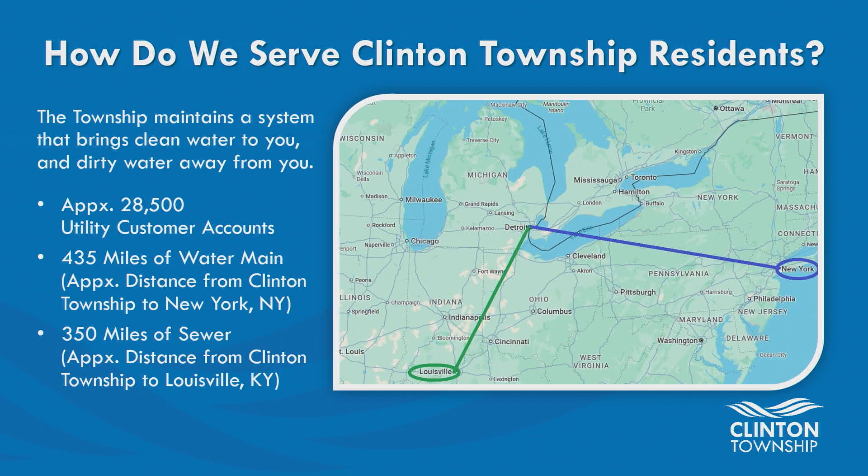So how do we serve Clinton Township residents? We have approximately 28,500 customers that we serve. We have 435 miles of water main. That is approximately, if you put pipe against pipe, end against end, from Clinton Township to New York City. Sewer lines, we have 350 miles of sanitary sewer lines, which is approximately from Clinton Township to Louisville. When we were putting this together for a visual, it's just seeing the amount of mains, but of course those mains also have thousands of hydrants and valves that we also maintain with approximately 26 utility workers. So the enormity of the system and how much we do maintain, I don't think it can equate to a slide, but we try to do our best with the distance to the cities.

So part 1, we're going to talk about water first. We purchase our water. We do not do our own treatment. We don't have our own well. Some places, some communities do. We actually get our water from the Great Lakes Water Authority, otherwise formerly known as Detroit Water and Sewerage Department. And there are sections in the township that we actually get water from the city of Mount Clemens.

Our testing of our water to make sure that it's safe and reliable is in partnership with GLWA and Mount Clemens. And then anything you want to know about our water, by state law, we have to put out what's called our annual drinking water quality report. That comes out in July every year, and that report is available online. This July we'll have a new one that comes out, and you can look back at past history. We have all of them up there, so you can look back on it. But that's kind of the science behind it, so I'm not going to get into all that, but it's there if you want to be able to see it.

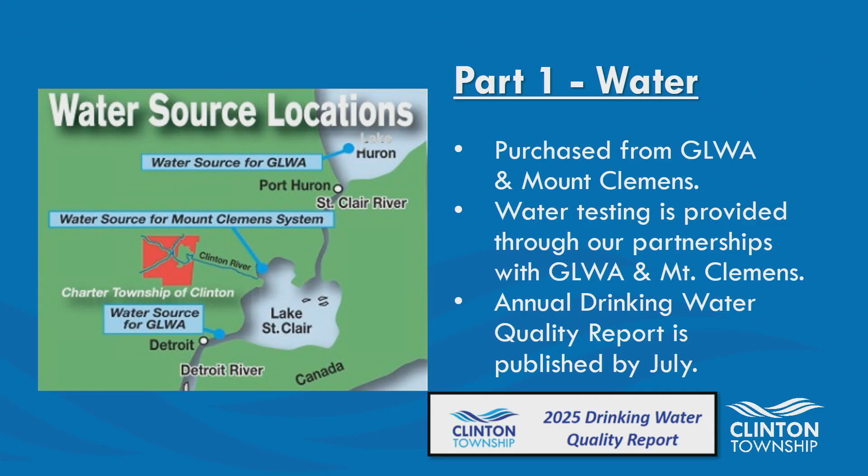So what do we do for you? What is our responsibilities? We maintain and replace our water meters. We maintain evaluations of our water lines. We repair water main breaks. Hopefully none of you have had those this winter. We've had quite a few just because of how cold it was, but not like we did back 10 years ago, so that's a good thing.

We run our cross connections and backflow inspection. And then we also do what's called our complete distribution system materials inventory. Some of you may have seen this. This is a result of the issue that happened in Flint and making sure that we don't have lead water lines. So this is to make sure that if we do, that we replace them.

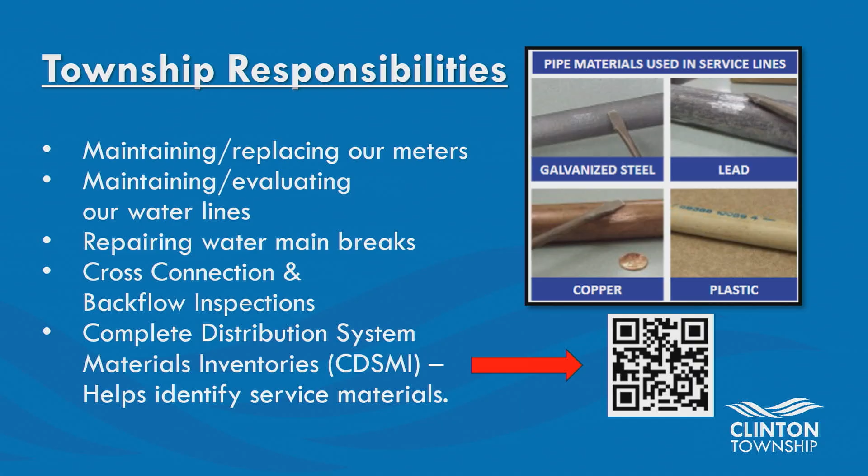Some of you here today, and being that it's on tape, may have gotten a letter from us saying, hey, we need your help. Please use this QR code or call us to make an appointment. So if anyone's concerned or has any questions, you can call us, the department, and we can walk you through how to take a survey. We also accept emails or meter appointments as well.

So here are some homeowner responsibilities that you may or may not think about or know about. Your responsibilities involve leaks and high usage. We can't monitor every home. We have 28,500 accounts, so we can't monitor every home and say, oh, it looks like you have a leak. So it's your responsibility to make sure that your plumbing is working properly. Repairs within the home, that's your plumbing, making sure those are taken care of. The repairs from the street to the shutoff valve, there's like a round circle that you sometimes see in sidewalks or in your yard, that's your shutoff valve. From that to the house, and into your home, that is the homeowner's responsibility.

And then any potential cross connections. I think it's important to point out, so we went through the responsibilities of the homeowner, but also offerings that we can help with these things. We do have leak detection packets available. So if you think you have a leak, sometimes you have a high water bill and you see your sink running and you go, oh, I have a leak.

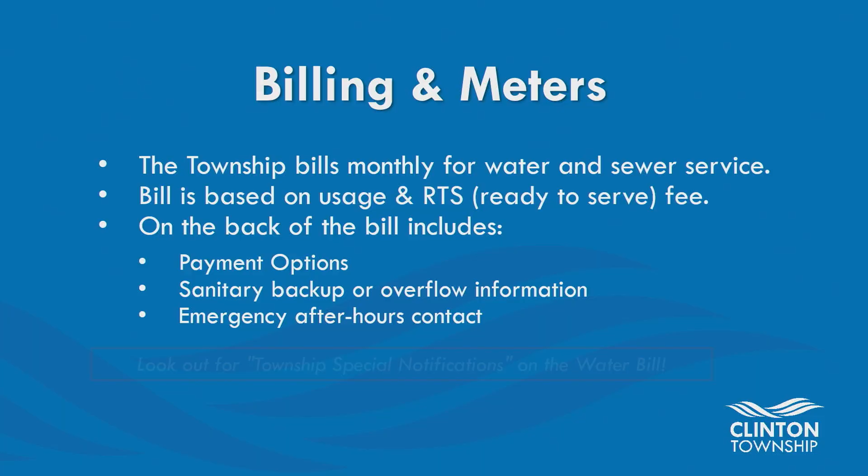Going into billing and meters, the township does send monthly water and sewer bills. Some other communities do quarterly, but we have been doing monthly since before I came to the township, so that's been for over 20 years. We do have on our bill a ready-to-serve fee as well as a usage fee, and I'll show you some of that on the next slide.

The back of our bill tells you about our different payment options. It has information regarding sanitary sewer backups and overflow, and our after-hours contact number. Last but not least, on the front of the bill we have a section for township special notifications. There we'll put different things - this conversation today was put on the last water bill, and when we do the water quality report, that will be put on the water bill too.

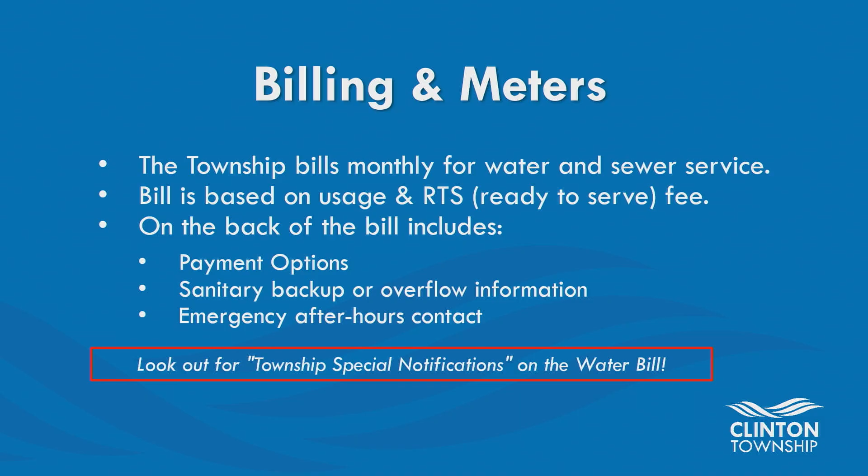The next line is your sewer. Sewer is based on your water - we don't have a meter on your sewer, so if you use 2 units of water, we assume 2 units of sewer goes down the toilet or shower or whatever you're using. That's where, if you have an irrigation system, a deduct meter is worth using, because the water that goes on your lawn doesn't go into the sewer, so those numbers would be different. You might see water use of 7 and sewer use of 2 or 5, because we deduct what went into the yard.

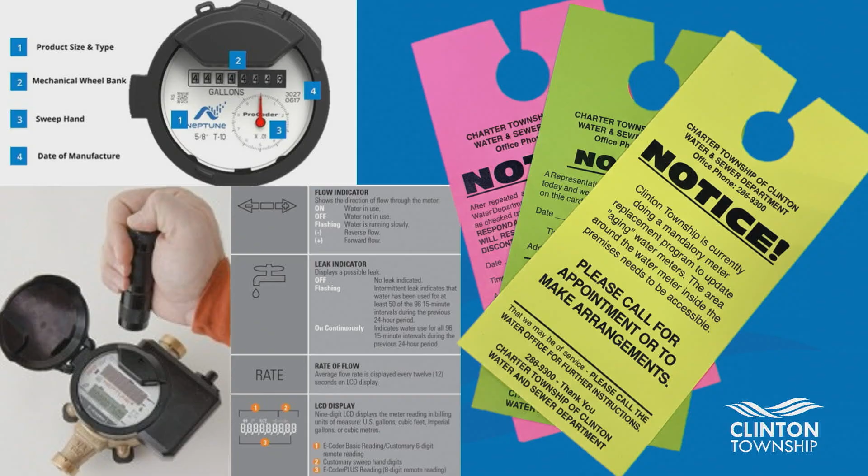Early on in the meter change-out program, we were using digital readouts. With newer technology, the ProCoder, which came out a couple years ago, does the same thing - it takes the same technological readings - but now it goes back to the analog dial that most people with older meters are used to, where if the water's moving, the bottom hand, the sweep, is moving, and the units are registered on the top dial.

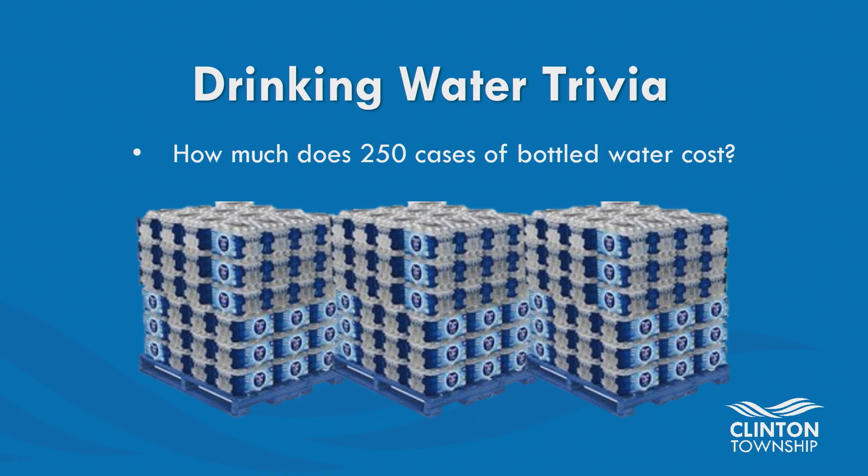Okay, here's a little drinking water trivia. How much does 250 cases of bottled water cost? 250 cases of water cost $742.50. I'll tell you, I use Meijer or Kroger on sale at $2.97 a case, so I was bargain shopping for you to get this number, okay?

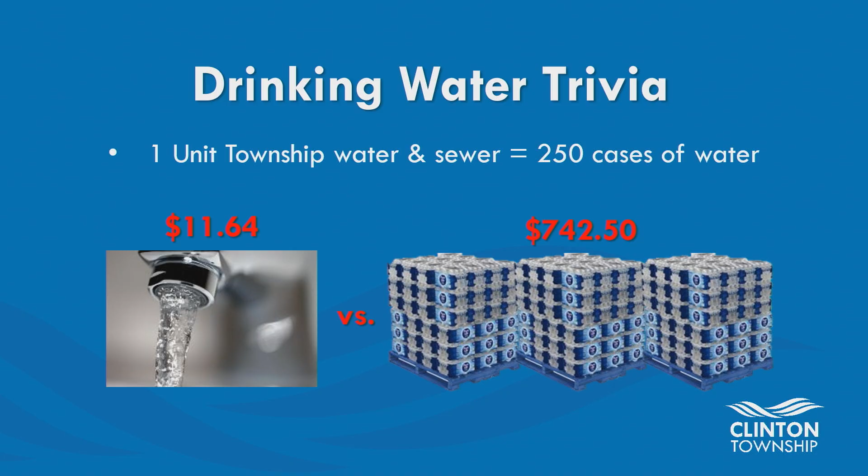One unit of township water - so when we look at that bill and say a person used 2 units, they used 500 cases of water, because 1 unit of water equals approximately 250 cases of water. Using Clinton Township's water rates, that would have cost you $11.64.

Part 2: what happens to water after we use it? It goes to the sanitary sewer. In Clinton Township, we're on what's called a separated system, meaning you have a sanitary system and a storm system. Sanitary systems carry your toilet water, shower water, laundry, all the things that go down the drain - I'll call it dirty water. Your storm water sewer system is for storms, rainwater - it's what you see in the streets, the catch basins, picking up rainwater and water that comes from the sky.

The sanitary sewer is taken away from your property. It's typically located near the street, usually between the street and the sidewalk area. The pipes lead to a treatment plant, and the township sends their sewer to what's called the MID, the Macomb Interceptor Drain Drainage District.

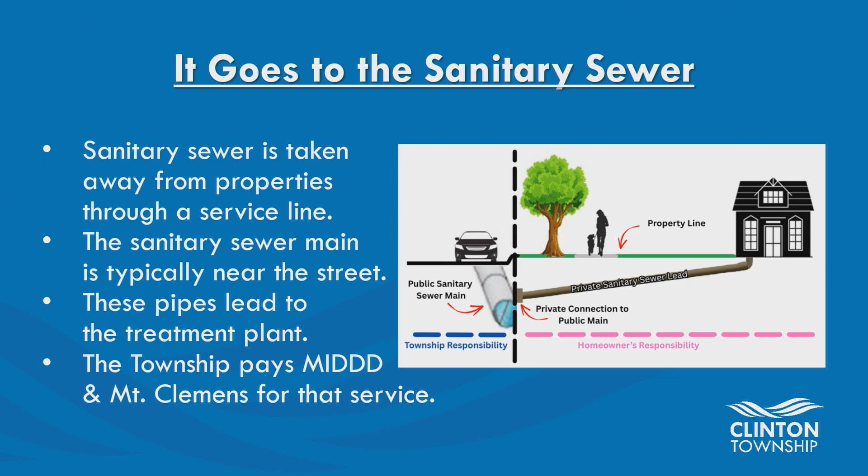I think that's a good segue into what we're going to talk about next, and how intricate the systems are, because there's homeowner responsibilities and there's our responsibilities. One thing that comes to mind is when we talk about whether it goes to the MID or to Mount Clemens - Clinton Township is unique with the river and its three different branches, so a lot of our system has ups and downs.

Some of the reasons why sanitary water goes to Mount Clemens is based on geography. The water geography fed from Mount Clemens is a little different than the sanitary flow - some areas that get water from Mount Clemens actually send sewage to the MID system, and some areas that get water through Clinton Township actually send it to Mount Clemens. So it's kind of interesting to me, but we thought this would be the best way to explain it, because it also encapsulates how Clinton Township runs.

Most of your sewer is gravity fed, so it goes from a higher portion to a lower portion. With our sewers, we have to get it back up to a certain height to keep it going to Mount Clemens, depending on where it goes. Clinton Township has 13 lift stations that we operate. People don't really see that part of our operation because most of the time your sewage goes away with no problems and people aren't affected. That's one of the things that's out of sight, out of mind, as Mary said. But we take pride in these 13 pump stations because it takes a lot of work and maintenance to keep them running.

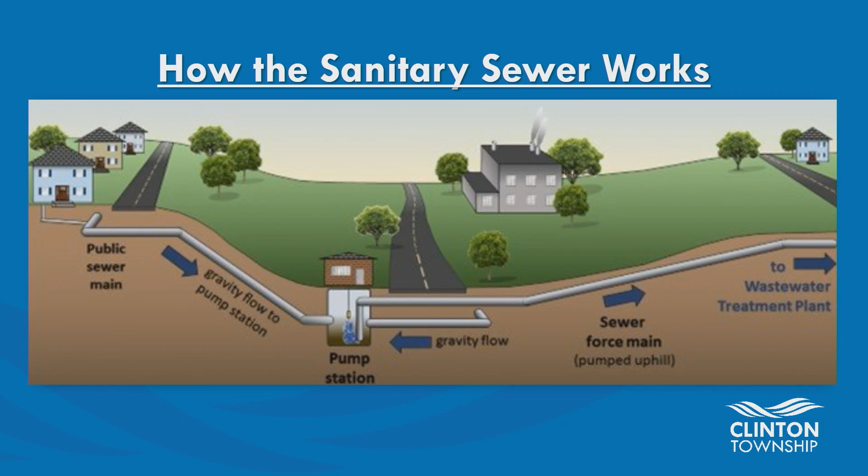I'm sure hardly anybody's ever looked inside the pipe. So what we wanted to show here is this first picture is the pipe that the camera is in. We're sitting in a pipe, and what we're looking at is called a lateral offset. So if this was your home, your lead is offset, it's not going in properly. What you want to see is more like the second one, where it's a complete circle and you're coming right into our pipe. The first one is the offset, and the second one is fixing that offset so the pipe comes right in. If you look at your sewer lead, see how round that is? That's good, it means it's connected properly to our pipe.

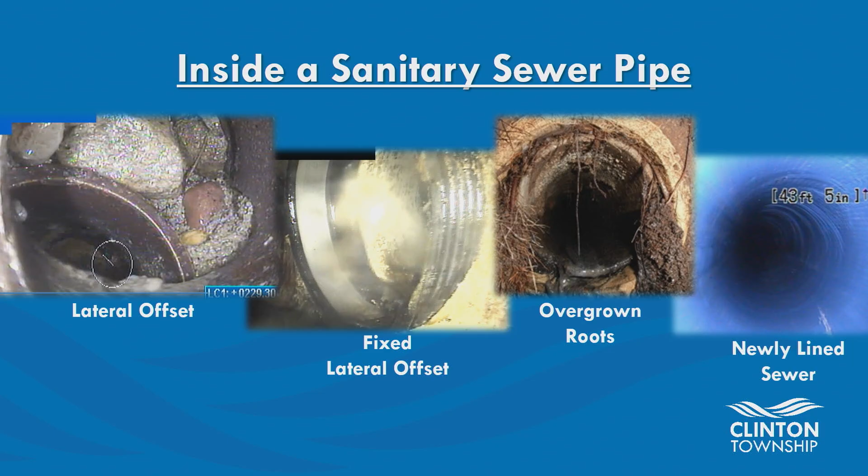However, you see all those little hairy things? Those are tree roots. The next one shows how, if you catch it early enough, you're able to line that sewer lead. You see how that pipe going in is all smooth? That's what that sewer lead looks like once it's fixed, and you've cut out all of the roots.

Okay, flushing etiquette, my favorite part of the story. What not to flush and what to flush. What you flush is toilet paper, pee, and poop. The 3 P's: paper, pee, and poop.

There is this product, and if I could have 2 volunteers, this would be great. I'm not going to put you on the spot, but you are going to have to come up. 2 volunteers, okay, yay, one, and I've got a second. Perfect, so I'm going to hand this to you. Can you read out loud what that says? Uh-oh, flushable, that's a lie. Oh, I like her, flushable wipes. And what is this, young man? This is TP, this is TP.

Okay, we're going to open these jars. I'm going to hand you this. We're going to open these jars. You're going to put a wipe in this one, and you're going to put toilet paper in that one. Make sure it gets in there, because we're really putting it in the toilet. Okay, put the lids back on. Joe, make sure it's tight so no one gets it all over them. Now you're going to hand this back to me, and you're going to shake it. Turn around so the camera can see you too.

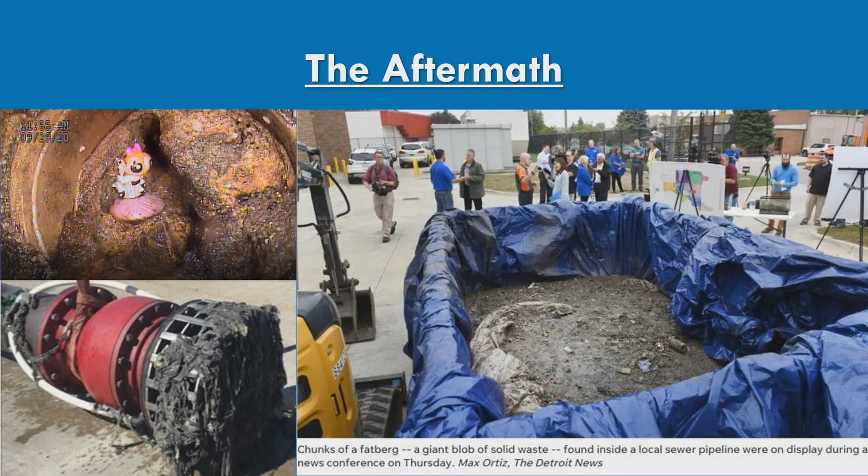Why is that important? Because they clog the pipes. But also those pump stations we were talking about, the 13 pump stations, those have fans, and the wipes get caught on the impellers basically. That causes them to stop working, which then in turn causes problems in people's homes. Here is some of the aftermath, these are all sewers or stuff that came out of Clinton Township. One of your neighbors put that beautiful toy in the sewer, and we were able to find it. We didn't find who it came from, and we didn't return it, though. This is the fatberg that Candice Miller's office has talked about quite a bit. This is those rags, the flushable wipes, stuck on one of our pumps and causing a problem.

The next thing is our kitchen sink etiquette: what to wash down, and what not to.

Soap and water, yay. Everything else, pretty much no. Even if you have a garbage disposal, it's better, but stuff still gets stuck and causes problems. One of the biggest things we've found is straws. Believe it or not, a lot of restaurants, when you bring back a drink glass, just dump it in the sink so they can throw the glass in the dishwasher, and those straws go down our sewer.

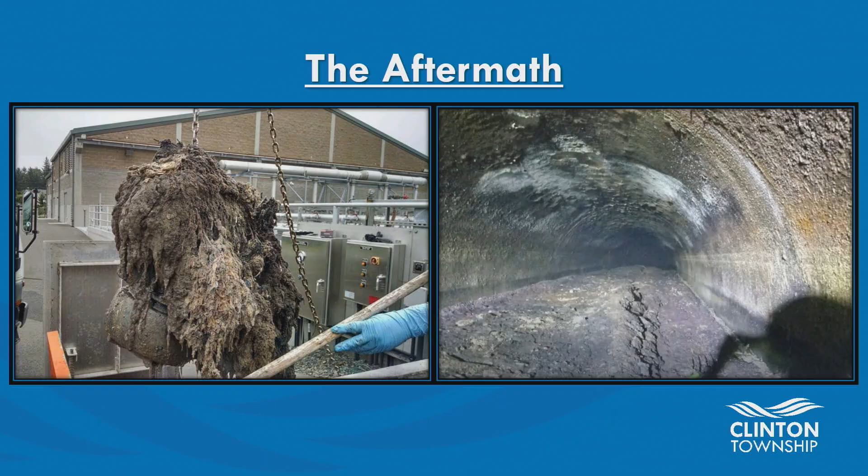And here's some of the aftermath from the stuff that goes down kitchen sinks.

So here's some of your homeowner responsibilities. The sewer line, the service line, your lead, is your responsibility — the tap to the structure, to your building. If you have a backup you're concerned might be our line or your line, we will come out right away and check our line first to make sure it's not anything we could control before you go out and call a plumber. We typically tell homeowners to talk to three plumbers, but we will always come out if you're experiencing a backup to make sure it's not our line.

Mary glossed over this quickly because we were trying to get through the etiquette, but one of the big things was grease too. We didn't really touch on that — fats, oils, and grease. A lot of people think restaurants are the biggest culprits, but homeowners also put that down the drain.

What happens is the grease or oils are typically liquid, but by the time they cool down and get into the sanitary main or even your main, they harden and cause problems for both homeowners and us. So it's not just that we're saying this because we don't want the maintenance on our end — it's also yours. If there's roots, a belly, or an offset in your line, that's where it's going to get caught up and cause the homeowner problems as well.

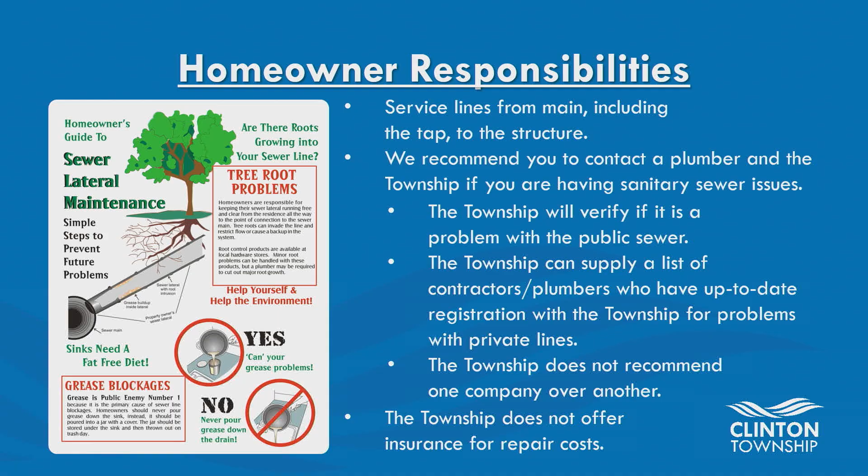So, upcoming projects. These are some projects that have been completed, and these are some of the projects coming up in the following year.

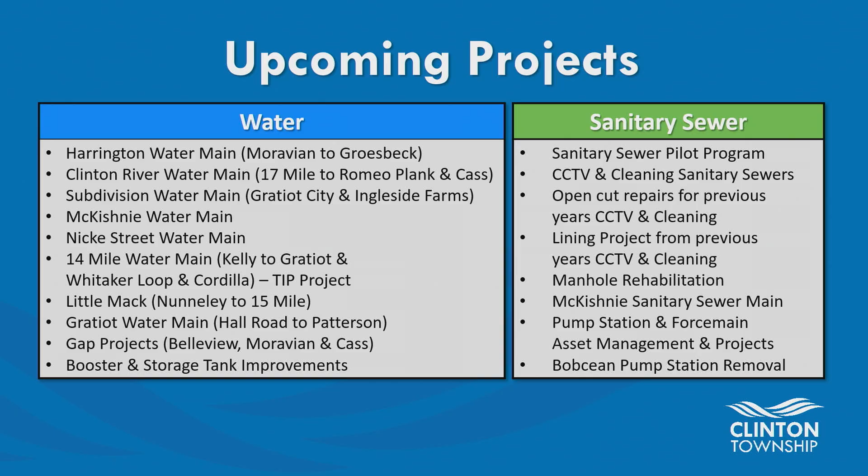I do want to mention, in the sanitary sewer projects, the top one is our sanitary sewer lateral pilot program. That's a program we receive congressionally directed spending on, and it's to help property owners fix their sanitary sewer laterals. It's for homes older than 1974, because the type of pipe used then is called vitrified clay pipe. They're kind of, for lack of better words, like a terracotta pot, so they crack very easily with tree roots and so forth. So your house has to be older than 1974, you have to have vitrified clay pipe, and then you have to income qualify.

Our phase 1 is happening right now; beginning of April we're going to start phase 2. If you have questions or think you might qualify, call us and we'll help you go through the process. It costs nothing to apply, and there's no commitment. If you do qualify, you might get 50% of that expensive repair project paid for, or you could get 100%. So it's worth the time, it doesn't cost you anything, and it could save you money.

And I think that is it.

There was mention of water rates between municipalities. As the former treasurer, I got a lot of phone calls asking how come the water rates are so much higher here in Clinton Township — they weren't as high in Sterling Heights. Not all communities are the same.

Clinton Township is a mostly residential community. So that means the money coming in to pay for the services we provide comes from our residents and the commercial properties we have, mostly retail, strip malls, those types of things.